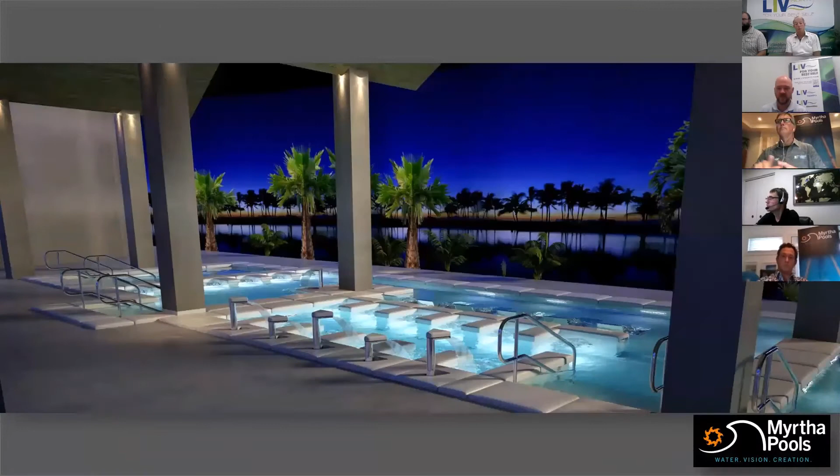We have an amenities division, which manages over 75 different facilities, corporate, college, with staffing right across Canada, pretty well every province.

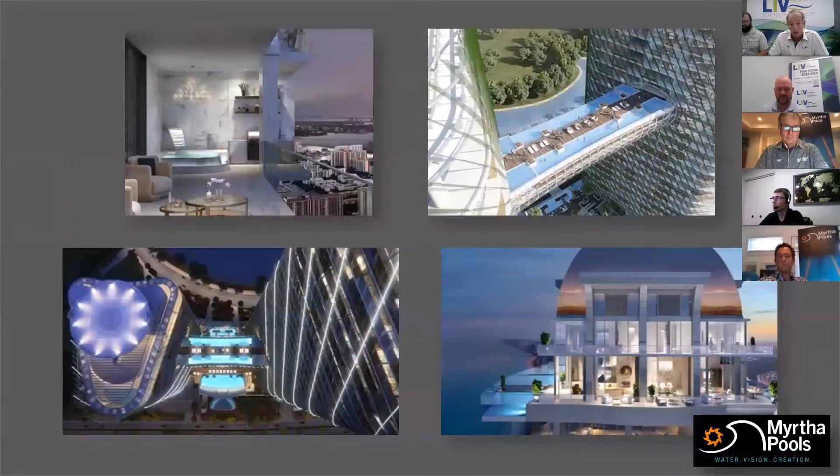They've got a digital platform and a virtual platform which have just taken off in the last 6 months, and we've introduced them into the high-rise residential market. The King Set building down at 99 Gerrard is going to be our first live experience building using that digital platform, tying into all the equipment in the area. So it's a pretty exciting time for us.

The Myrtha relationship has been a great one. We've been asked many times, do you do anything with pools, get into construction of pools? Obviously we don't want to be dealing with this concrete mess. When we saw the Myrtha technology, we said, here's an opportunity, this is the best option we can think of. It's clean, it's creative, imaginative, it's everything we need when we're dealing with these buildings.

So today is an introduction into that system. On the screen you can see we've got Dan Thompson, CEO for Myrtha Pools Canada. He's going to be introducing you to Myrtha. Alex Schmoll is the design manager for Myrtha, the guy we go back and forth with on all the designs. It's a very clean system when we take your rendering, bring it into a design, and send it back over to Europe to Alex. He's been great.

Mark Versfeld, I think, is on, yes, from Western Canada. For the few of you out west, we've got 2 salespeople in British Columbia, 5 in Alberta, and they liaise with Mark on a regular basis. And then we've got Ross Middleton, our senior accounts manager. He oversees the aquatics sales and division. He's in the industry, a lot of experience, done many pools, lived through many headaches you'll hear about.

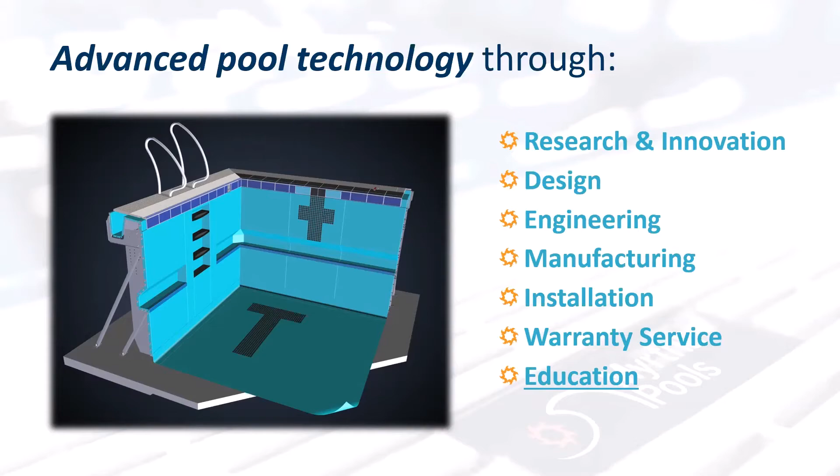We have 4 market segments, 3 shown here: competition, hospitality, leisure, and wellness. I'm not going to show you a bunch of glossy pictures of our competitive pools, but believe me, we have them. Myrtha Pools is known for its precision, enabling us to create the fastest pools in the world, from the Olympic pool in Rio to the rapid build US Olympic trial pools, which we build every 4 years and seat 18,000 people. Then they're taken down and sold to another community.

To the World Championship pools, over the last 10 years, Myrtha Pools is the gold standard in aquatic competition pools. In fact, over 145 world records have been set in Myrtha Pools to date. Frankly, it's that experience that has prepared us to become the right choice for developers in hospitality, leisure, and wellness market segments, and more importantly, elevated ones.

I'll be back in a bit to talk about wellness, but right now over to Ross to talk about Myrtha versus other build approaches.

Thanks so much. Thanks, Dan. Hello, everybody, and thanks for being here. An extra special thanks to everybody for taking 4 hours out of your busy day today to listen to the whole presentation. Of course, kidding, we'll keep it to a tight 45, respect for your time. On to the good stuff.

My name is Ross Middleton. I've been involved in condo amenities on and off for about 20 years now, mainly on the pool side of things, and in particular, the day-to-day upkeep, operation, and renovations of these pools. Although I tend to think I've seen just about everything there is to see in a pool, I'm still surprised every week by a new question or an exciting new project such as this.

So why did we decide to get into pool design and build with Myrtha Pools? Customer feedback. It's all about the customer feedback. I've been asked many times over the years if there was another option, another way to build a commercial pool other than your typical concrete pool. In the past, my standard answer was always no. Pros and cons aside, concrete was what people were familiar with and what was used. We ran into Myrtha Pools at a trade show a while back, got talking, and very quickly realized they addressed many of the common issues associated with a typical concrete pool.

So this slide and the next couple of slides are a comparison of Myrtha Pools compared to a concrete pool. There's some of the typical issues that I've encountered in the past on a day-to-day basis maintaining concrete pools. I'm not going to go over every point, as most of this will be covered in greater detail a little bit later on, so I'm going to focus on the big ones that I've always come across.

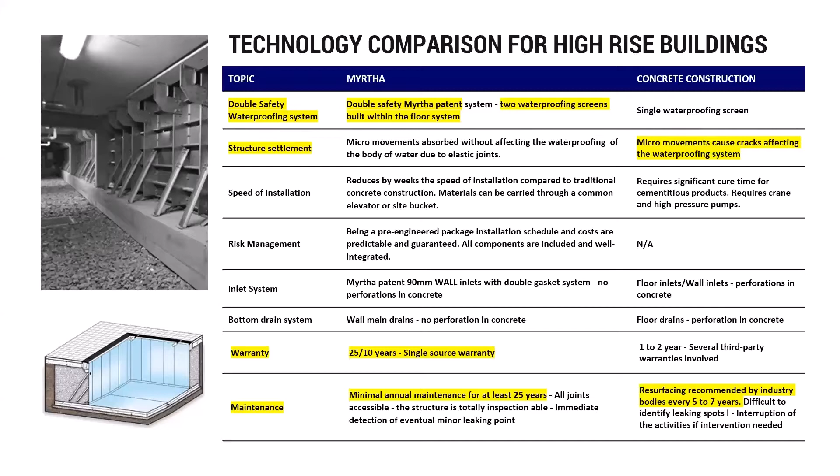The weight of a concrete pool is 450 pounds per linear foot in concrete. Myrtha is 65 pounds per linear foot. Those are crazy numbers.

Floor slab requirements: concrete requires heavy structural integral slabs. Myrtha requires no additional floor slab.

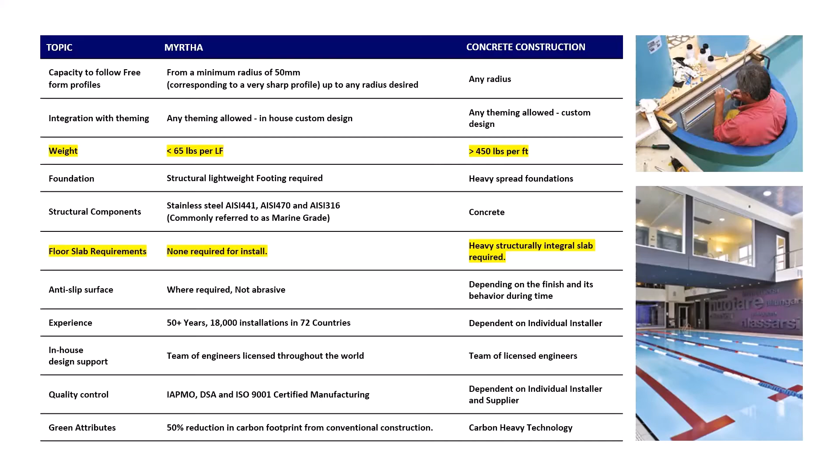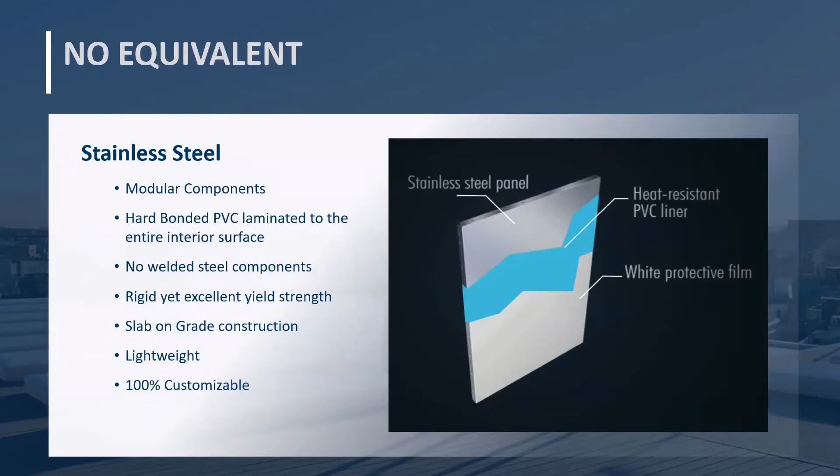Okay, so a little bit on our technology. Our panels are made of a marine grade stainless steel that has a PVC hot calendered to the face of it, and on the back side we coat that in a very thin acrylic coating, so essentially that steel is never in contact with your pool water. Additionally, there's a protective coating, that white protective film applied after the manufacturing process, used during shipment and during the installation.

It is a modular system with widths ranging from 900 millimeters and narrower, depending on the final dimension of your pool, and depths ranging from 0, or beach entries, all the way upwards of about 3.4 to 3.6 meters deep. We work in any sort of freeform shape. What you're probably used to seeing is our competition pools, very rectilinear, but that's a misconception. We can accommodate radiuses as tight as about 2 inches.

The major benefit of the modularity of the system is really in the elevated scenario, because all our components and accessories can be brought through a double door or through an elevator. So there's no need to crane up massive material; it can simply be brought up through manpower.

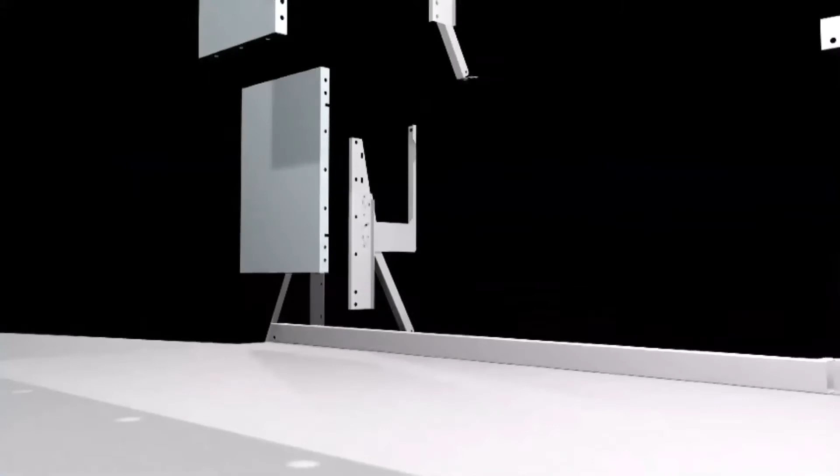Okay, onto the next video, speaking to the installation of our structure. Starting with the flat slab, stepped, or slightly sloped, the key points of the structure are laid out. Our C-channel base frame, at the bottom, is then anchored into the concrete with the elevation set.

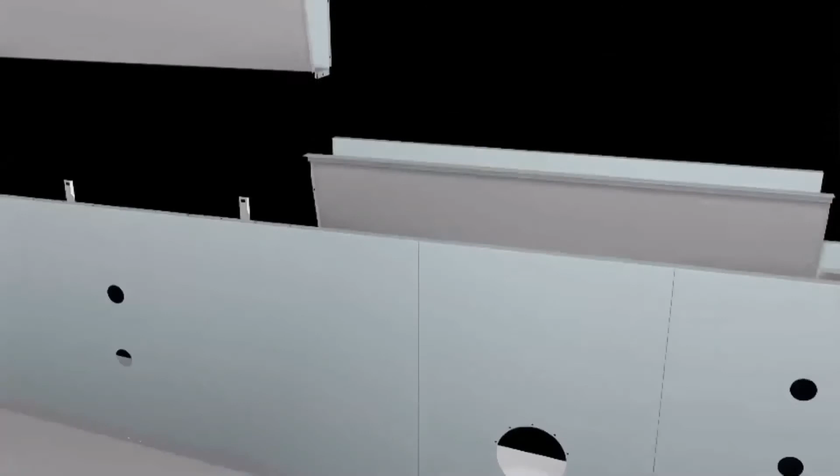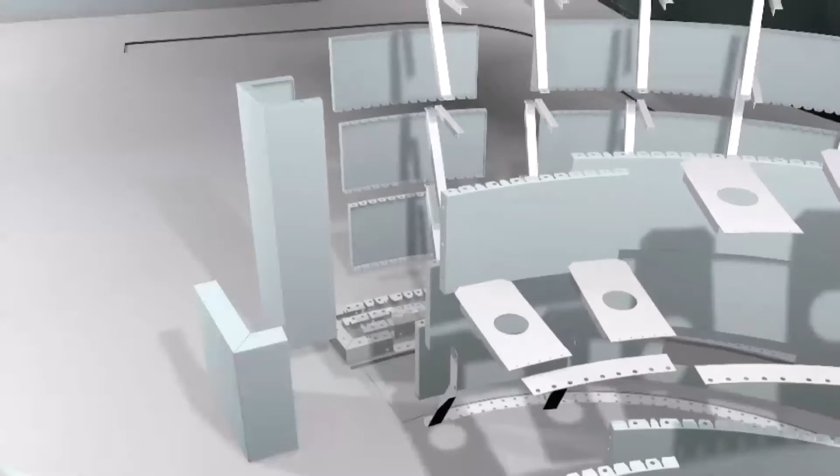Panels are then mounted with supports. Gutters are added, and final elevations are checked along the process. There are actually 3 stages, 3 checking elevation verifications along the way, to make sure that's exactly as defined and as designed.

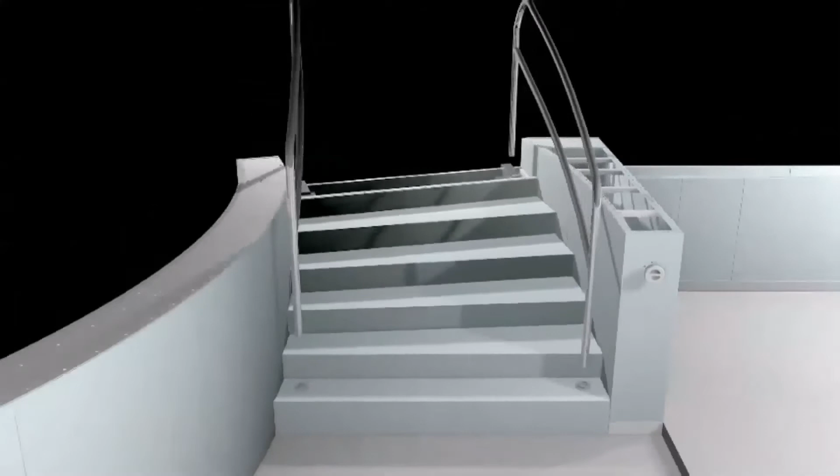Depending on the construction schedule, installation crews can either leave the site after the gutters are on and all the supports are in, for other works around the pool to be completed, or, if it's the case, continue on with waterproofing, and then continue to static test.

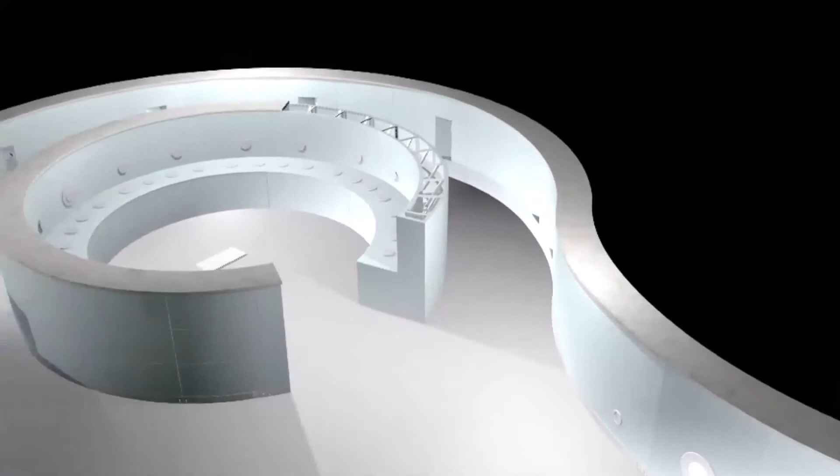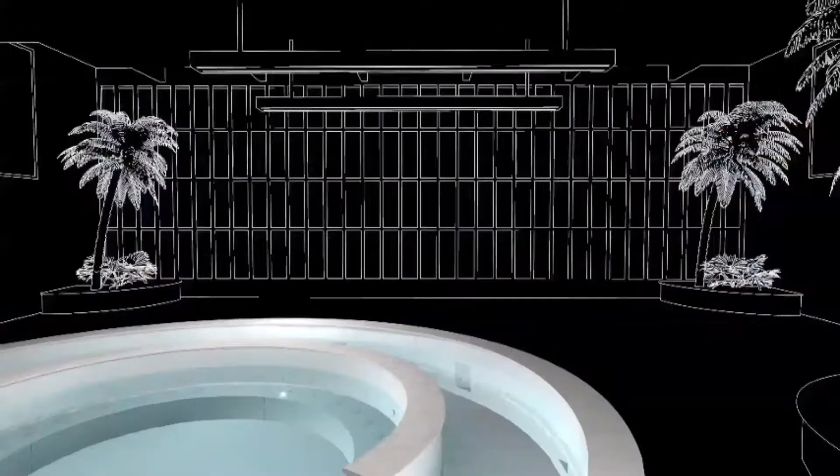We seal these panels using our liquid PVC, as well as applying our evolution membrane to the floor. Our liquid has a mild primer in it, which helps create a permanent bond between our panels, while the membrane extends up to the base of the panel where it's heat sealed, so in the end you get a watertight vessel.

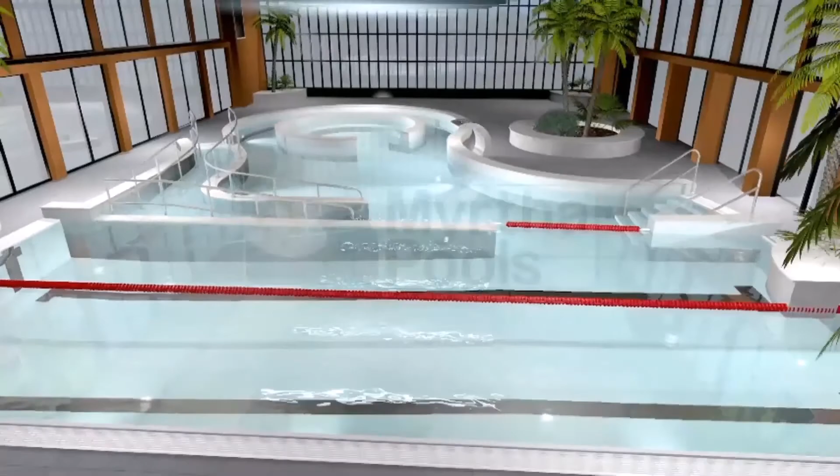We have a large catalog of gutters and skimmer styles, constantly innovating and customizing per client's wishes, and again virtually any radius we can accommodate. All our accessories come pre-located to site, so as far as guesswork on site, it's completely eliminated.

While our membrane panels are a finished product and can be left that way, you also have the ability to finish them in virtually any material. We have installs in Miami that have clad their spas in complete marble, or PebbleBrite. And again, the membrane itself can just be the finish.

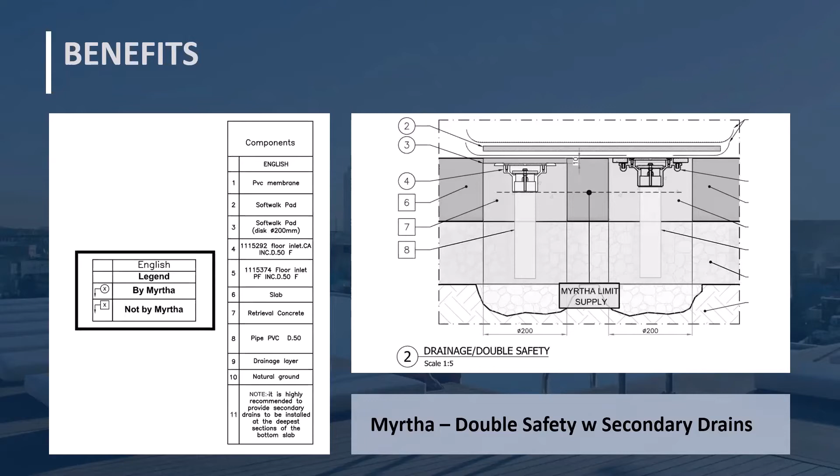If you'll skip to the next, this is a detail of our link plate. It's made of the same material as our paneling and used to provide a watertight connection between the pool edge and the surrounding deck. That lower red piece called the link plate, that would be that piece.

Actually this is reversed. The PVC membrane is meant to lie directly on that link plate, with the waterproofing layer over top. It provides a watertight connection between the pool edge and the deck, but because of that PVC membrane, it's also flexible. So it allows the pool to move somewhat independently of the perimeter deck, so you won't get potential cracking if your building is shifting, or swaying with the wind. It's coated in our PVC like our panel system, so it's a surface the deck waterproofing can be adhered to as well.

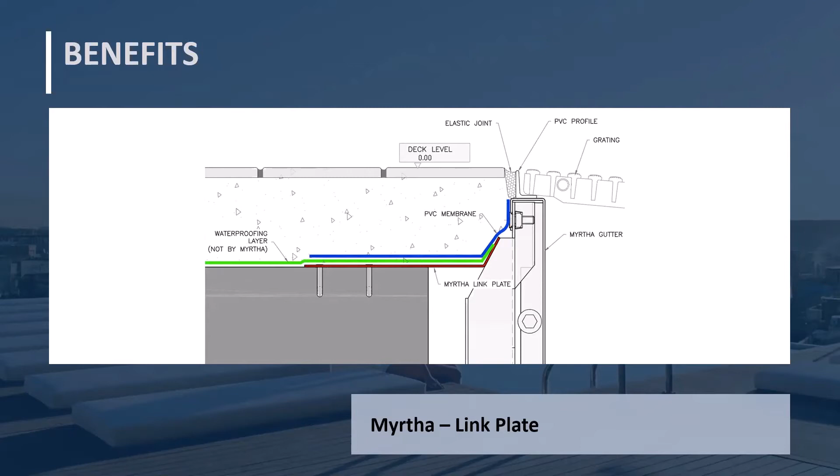As a rule of thumb, it's up for discussion, and we're happy to mount accessories in the floor, but we do like to pull everything into our wall panels, from inlets to lights to the actual bottom drains. The reason is it eliminates all the penetrations through that slab and any potential leak points. Thinking further down the design road, you could build a small curb around that pool and have a secondary or third containment system, because you're eliminating all those penetrations through the slab.

For the bottom drains, what we'll do is provide a gooseneck so you're still able to fully drain your pool, since as you can see in the detail, it sits slightly off the floor. Additionally, having everything wall mounted gives you access to them after the fact, so you're not embedding them in a concrete slab or wall. If there's an issue with piping down the road, you have access and can fix it with little to no disrepair or demolition, significantly less than casting it into a concrete slab.

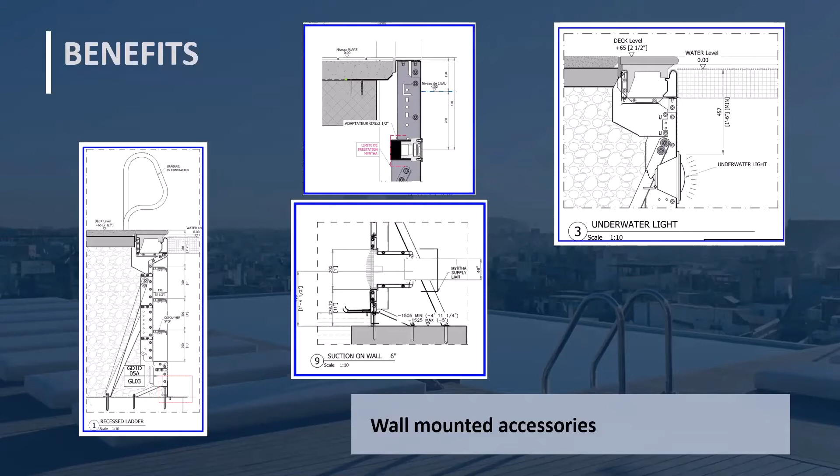Onto the next slide. This slide is meant to highlight the adaptability of our system. As Dan mentioned, we have over 300 plus designers at our home base in Italy, not including designers like myself spread throughout the rest of the world. As we work globally in over 80 countries, we're faced with a wide variety of situations and ever-changing scenarios, from full integration with infinity edge acrylics to converting structural building elements like grade beams into water features. We can achieve anything you're after. It may sound like a selling point, but we'll strive to do anything we can to achieve what you're after in the aesthetic.

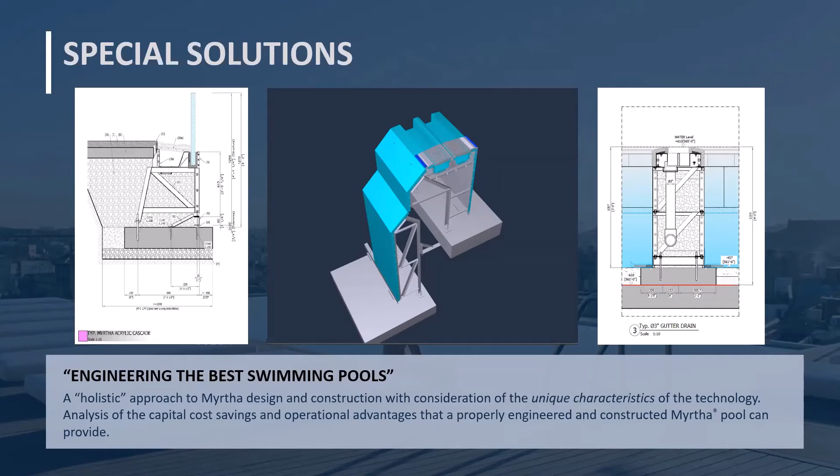On to the next. Speaking to integrated design, we have a design office located in Italy with over 300 designers, and we work in every sort of software out there, from CAD to Revit to BIM modeling to virtual reality, we can create it all. Further to that, we'll offer integration, since no one knows our system better than we do, so we prefer to model it ourselves. This slide showcases those different models and the integration of them.

The image on the left is the Myrtha model, the image in the middle is the architect's or aquatic consultant's model, and the one on the right is the finished model bringing everything together. The idea behind this is it eases the process, eliminates double duty of work, and streamlines the process for everyone. If you'll skip to the next slide, what we've done is create an Excel spreadsheet.

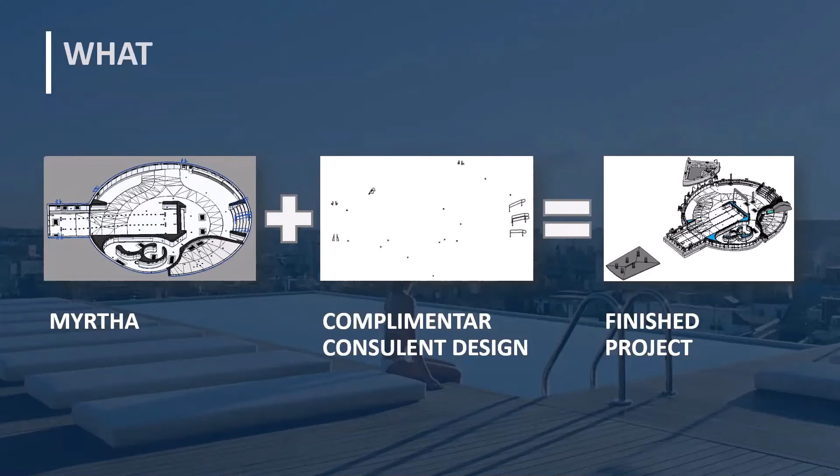This is an Excel spreadsheet that's highlighted the majority of accessories and other points that could be in a pool. Of course, this is always evolving, but what this does is help identify, locate, and quantify, and then whose responsibility it is. Again, this eliminates the unnecessary double duty of work.

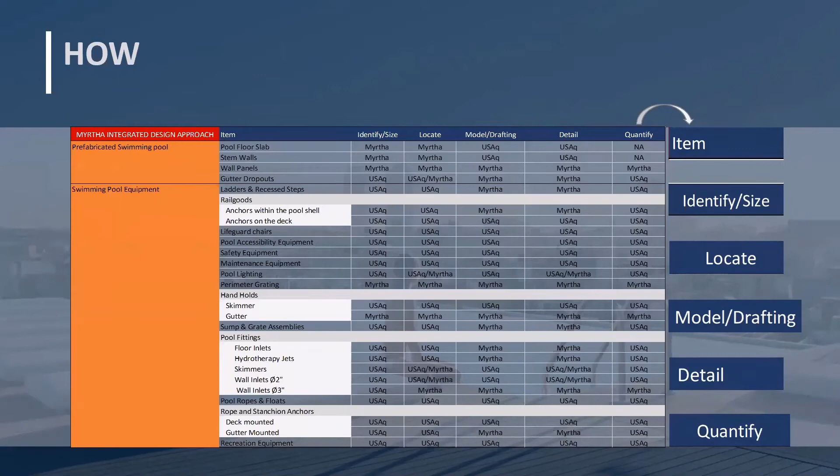Speaking to LEED design, if that's something your project or your client is searching for, we actually have a team over in Italy that's solely dedicated to this. So what we would do in that instance is connect the two parties, and working together, we'll try and achieve as many points as we can towards your project. That said, Myrtha can achieve up to about 44 points towards your project. Further information on that can be provided.

So speaking to some of our suspended pools, we'll just go through a few of our references globally. I'm going to highlight a few of the main interesting ones.

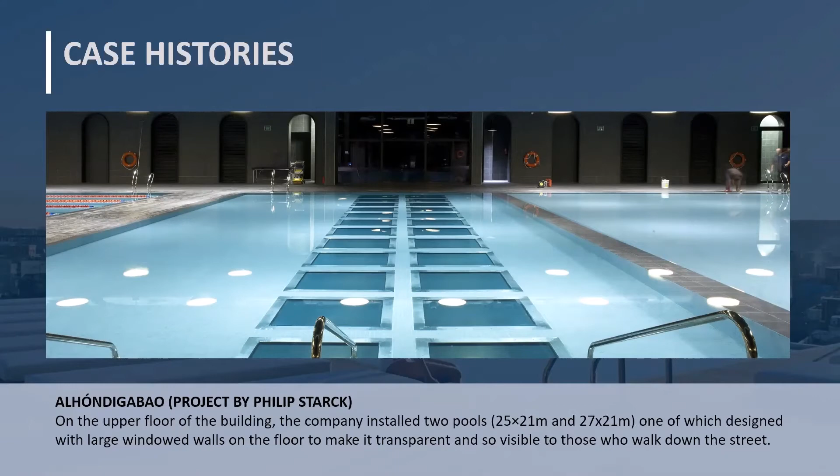This is an interesting one, a project called Alhóndiga Bilbao in Spain, designed by Philippe Starck. It's actually elevated on the 4th floor above a shopping mall. These are 2 foot by 2 foot acrylic panels set within the floor, again all provided by us. Underneath this is a walkway running the spine of the shopping center, where people will walk. Again, this is all on the 4th floor.

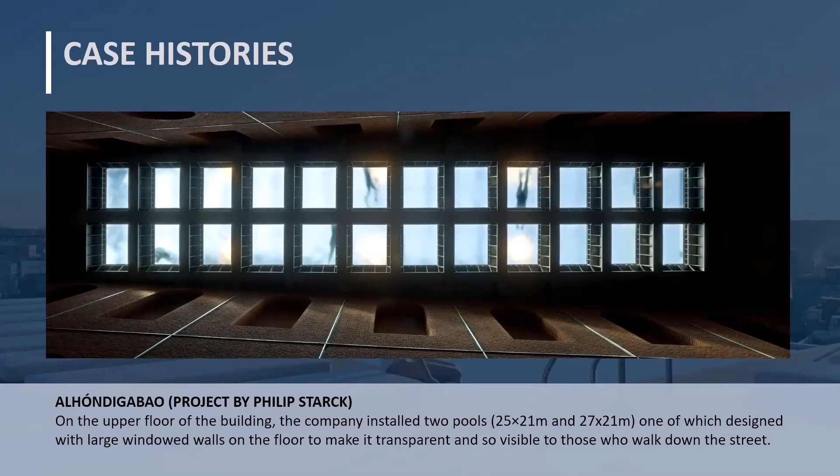Of course, hydro jets — we have a number of accessories in therapy and hydro that we can provide as well.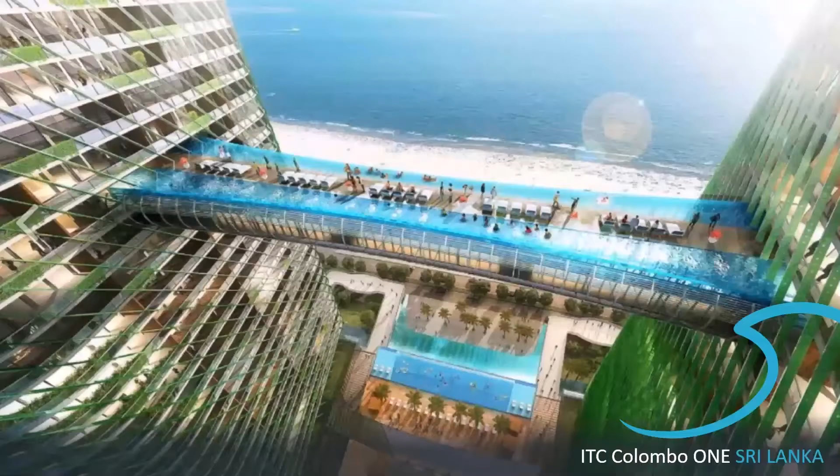Again, we had to overcome a number of obstacles in this, whether it be the actual installation or construction, because it was actually constructed on the ground and is being lifted up, but also the wind loads, because the desired effect is an infinity edge. So as soon as you introduce wind into that effect, it starts to dissipate. So anyway, on to the next.

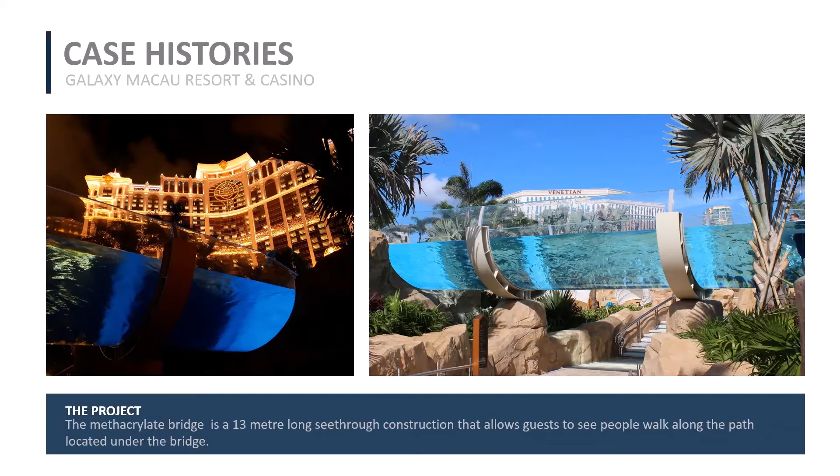So it is this one right here. It is roughly 15 feet wide, so it fits a double inner tube through that. Of course, it is supplied by us, the housing and the frames all by us as well, so it is patented, because in the summer heats, this acrylic will expand upwards of about 2 inches.

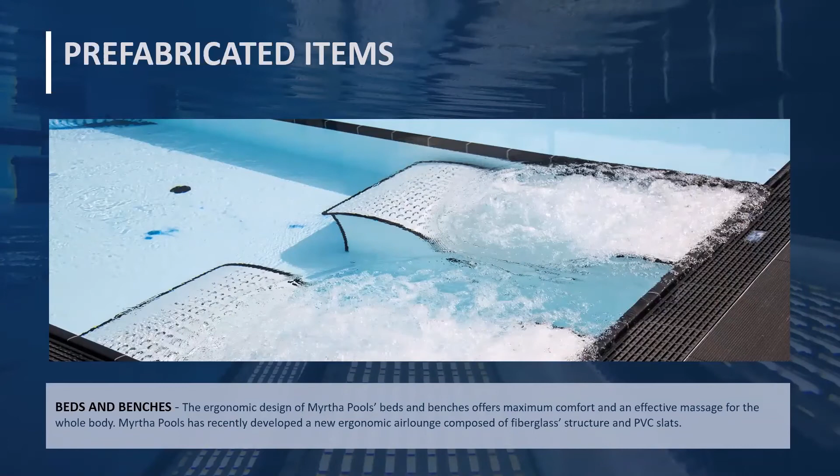All right, and I know that was fairly long-winded, so hopefully everybody was able to grasp most of that. And of course, any questions, feel free to reach out.

Great, I think it's back to me, Dan Thompson again. I want to talk about Myrtha Wellness. So let's go to the next slide.

Myrtha Pools discovered, especially in Europe, that while people want to be fit, more and more they want to be well. Myrtha Wellness is focused on giving people an unforgettable wellness experience. Our wellness division is focused on full design integration with a focus on future management and functionality.

Myrtha Wellness is focused on 6 services with a preference in full design, production, and installation. So consultancy, architectural design, technical design, production, installation, and after sales assistance.

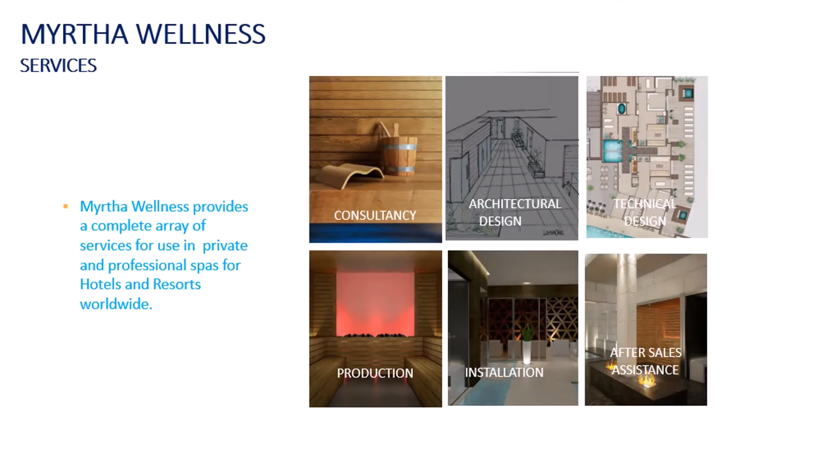So our design team works with you to fully understand the client's needs and objectives. We then develop a concept drawing and support your architectural and design needs.

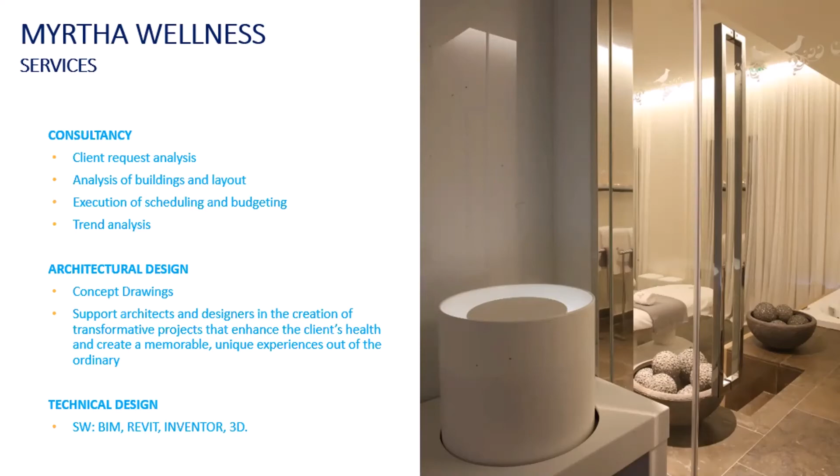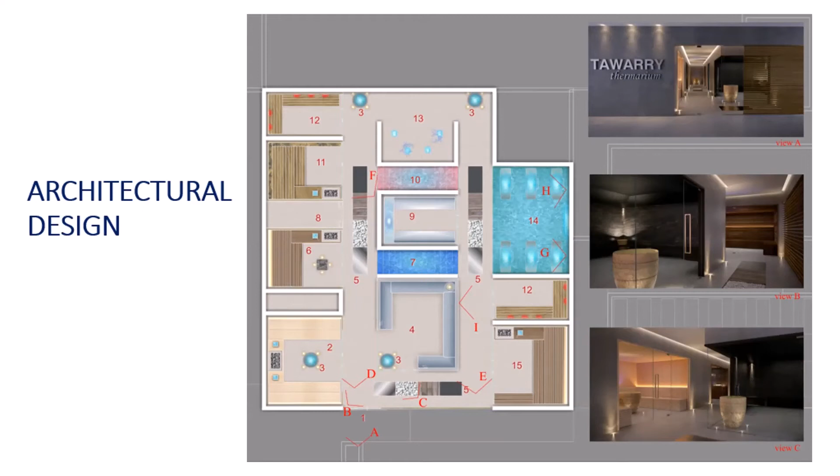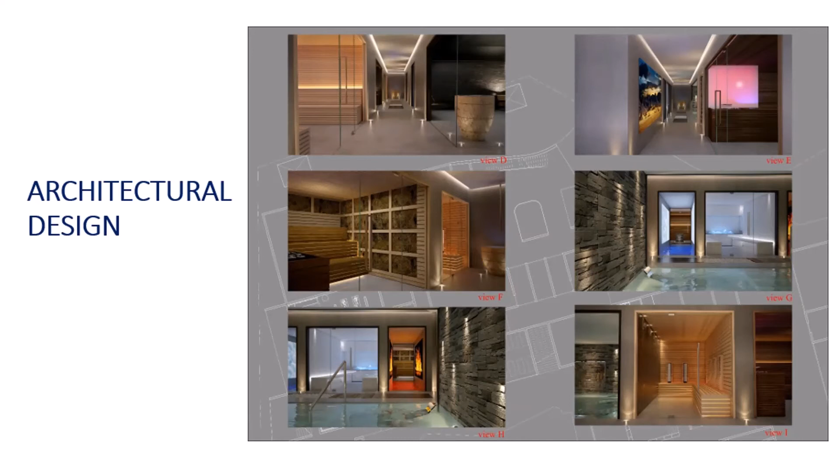And this is just an example of one. The next slide shows you some real life finishes to our approach, so you get a real sense from the work we do as to what the end product will look like. And then we fully design the project with your assistance.

So this is a great example. Villa Franca is a great example of our wellness capabilities. It's only about 30 minutes away from our factory, so when the world recovers from COVID, we'd love to host you there. It's been a big part of our business, hosting people, and we haven't had a visitor in 6 months. We're looking forward to COVID going away and getting a vaccine so we can move on.

Villa Franca is interesting. It's a renovated community center focused on recreation and wellness. The facility has a lap pool, a leisure pool, and a full service wellness center, a wonderful value add for the community. In Italy, if you're Myrtha and you want to build pools in communities, you need to be a partner, so Myrtha Italy created a division to manage facilities, and they actually manage this one. The municipality, Myrtha, and a developer renovated this space, which was an old bowling alley with a lap pool, converted into a leisure and wellness center. It's very cool—if you can make it to Italy, it's a great one to see.

This wellness center features a Finnish sauna, a steam room, plunge rooms, and a frigidarium, which is like an ice or snow room—I'll show you examples later. It's about a 30 to 45 minute experience that leaves people relaxed and energized, so if you come, bring your suit. What's really cool is that in 2021 we were building an exact replica in Candiac, a suburb of Montreal. It was great—we brought the developer there, he loved the concept, and he's going to build one this coming year.

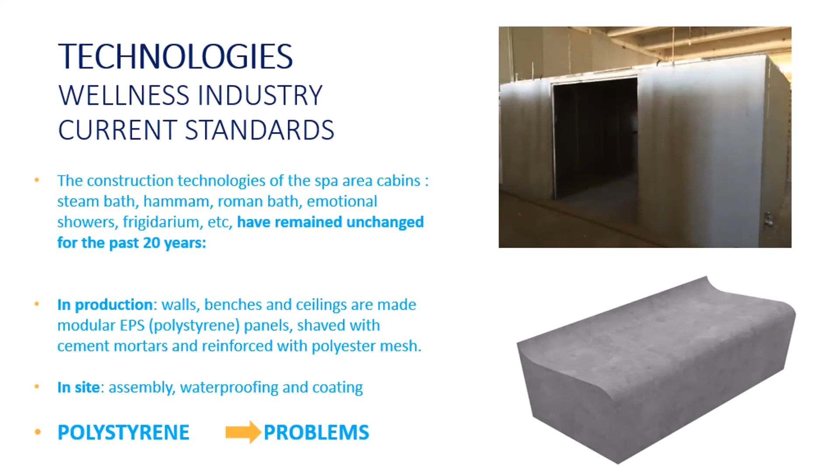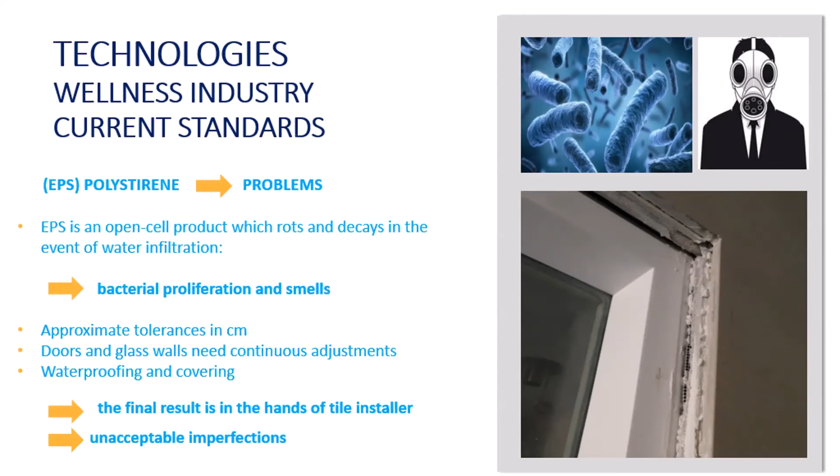I want to talk about Myrtha technology. Myrtha has changed up spa construction. Historically, spa construction utilizes EPS polystyrene panels shaved with cement mortar and reinforced with polyester mesh, and as many of you have learned, polystyrene leads to problems. Given the open cell nature of EPS, bacterial proliferation and smells can abound. Tolerances are approximate, leading to doors and windows requiring continuous adjustments, and the final results are frankly often in the hands of the tiler.

Myrtha is using its patented PVC bonded modular stainless steel process for walls and ceilings—we actually build the cabin. All accessories are pre-manufactured for easy assembly down to the final detail. For saunas, steam baths, frigidariums, and hot and cold plunges, we use the Myrtha stainless steel buttress system to build and create this prefabricated structure.

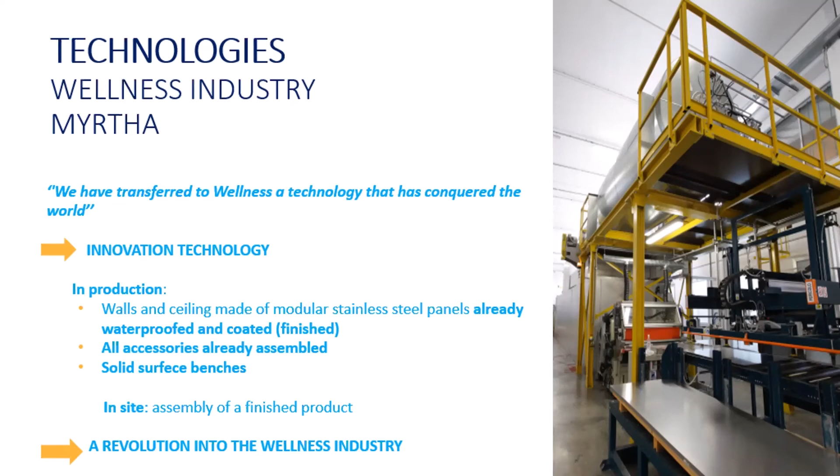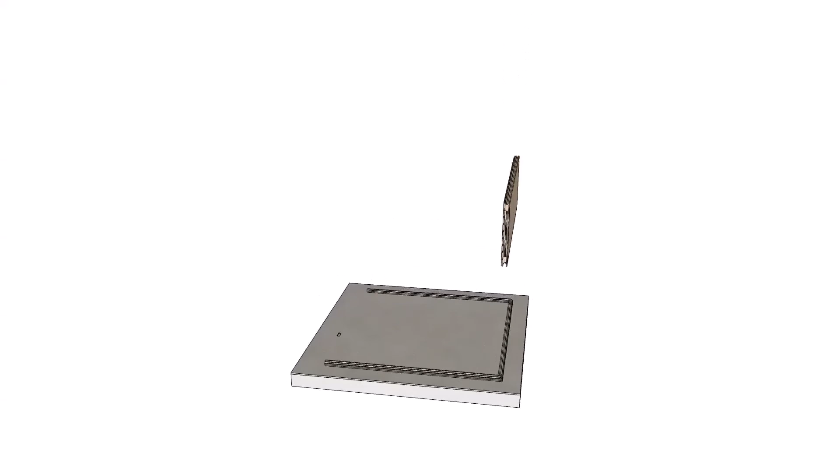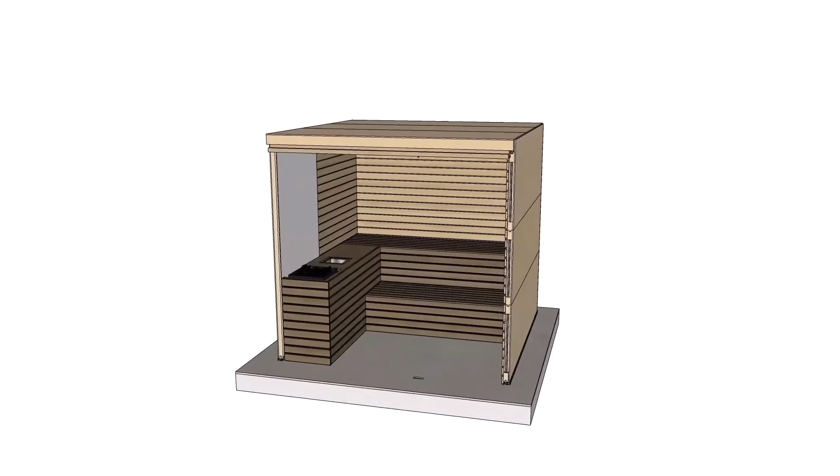We don't have to—this is a video, well, it's going, we might as well watch it. It's of a finished sauna and shows the construction. The steam rooms are made out of our panels and it's a little more dramatic, but this gives you a good sense. Basically all you have to do is prepare the floor in the tile you wish, and everything comes modular—it all fits together, shipped in a container, and put together by your installer. There are, as an example, 15 different sizes for our saunas and steam rooms. You get all the elements: the heater unit, the lighting, the wood benches or water features, etc., and even the glass doors. Great concept, fits together well, very modular—takes the guesswork out of the build for sure.

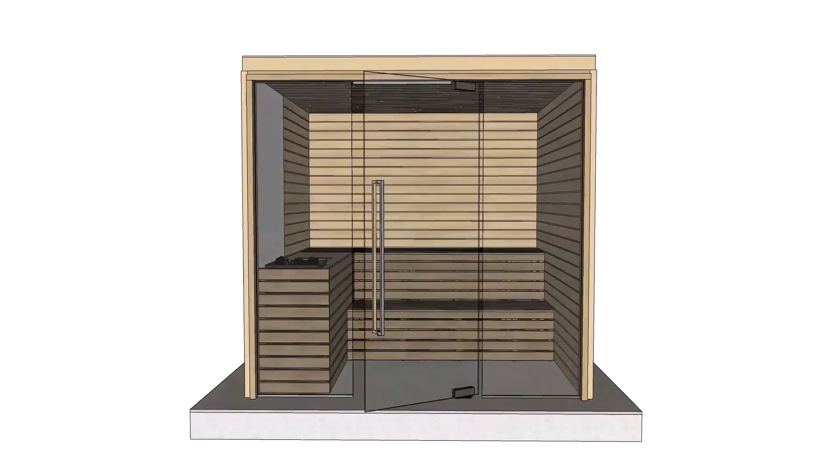Okay, let's go on to the next slide.

Myrtha is using its patented PVC bonded modular stainless steel for the walls and ceiling, as I just described. All accessories are pre-manufactured—I went through that. So play the video. Sorry, I'm on another slide. Okay, so this just talks about our system, the fact that we reduce the time to build, and then we take the stress out of putting your faith in the tiler to make sure it all fits properly.

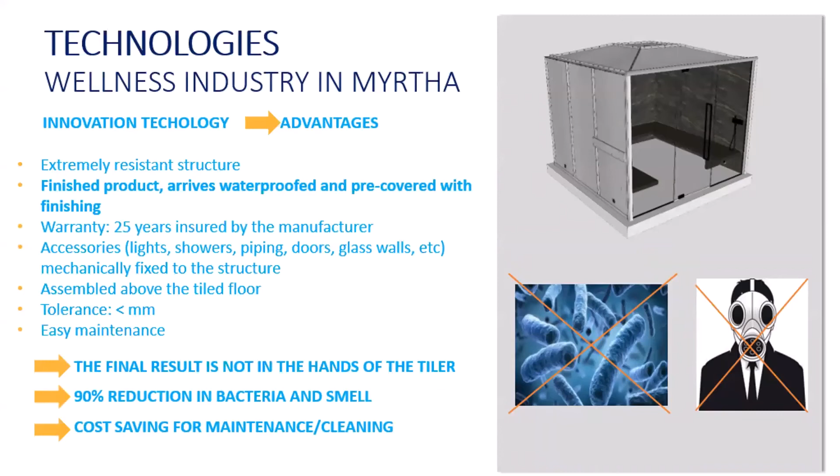Next slide. I'm just going to go through a series of images of our various products. So this is the steam bath. Next slide, go through this quickly.

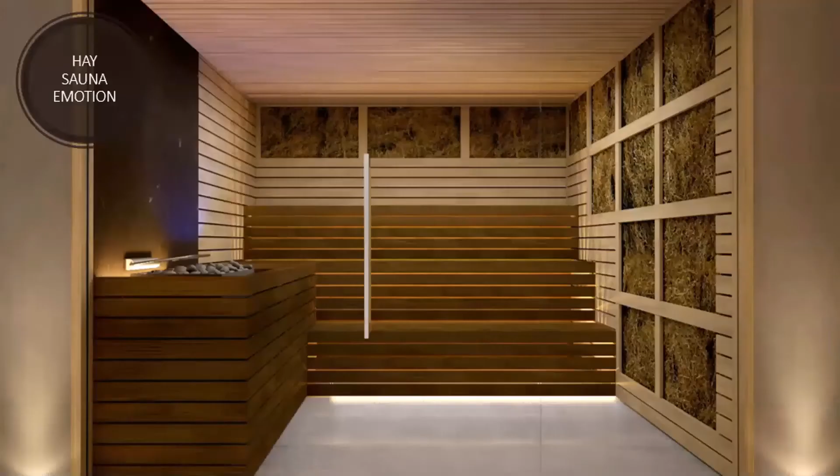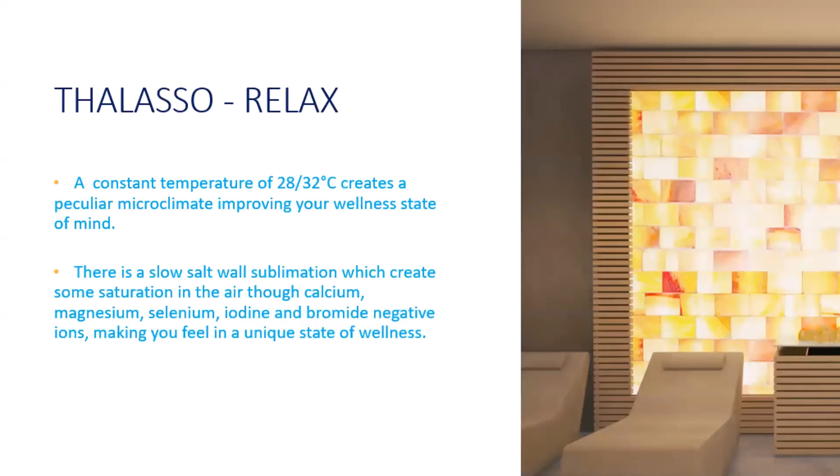And this is a relax area. So this is a salt room. Next slide, just hang on here for a second.

So we supply the wall with the salt cubes and the heat unit, and then you buy separately the different lounges. We have a huge variety of lounges that you can buy, which I'll show you in a second.

Okay, next slide. This is interesting - this is a frigidarium, an ice fountain, which comes as either an ice unit or a snow unit. At our factory, we've got a great display with the Matterhorn in the background. So if you're in Vancouver, you could have Whistler; if you're in Calgary, you could have Lake Louise, or whatever's relevant.

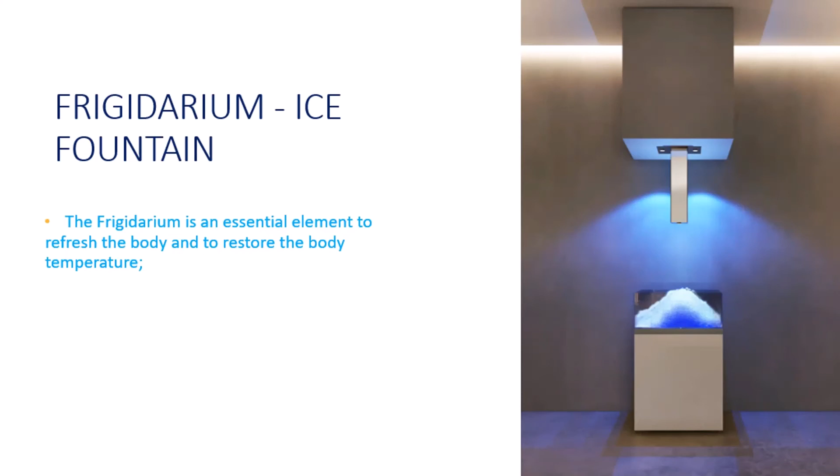Basically what you do is splash yourself with ice, then go into a sensory shower and cool down. Next slide - just showing you some different examples of this ice fountain with different sensory showers.

The plunge pool is really interesting - these plunge pools are hot and cold systems. The water is generally 14 to 15 degrees Celsius on one side, and 35 Celsius, 95 Fahrenheit on the other side. This aids in rapid muscular recovery and elimination of lactic acid after intense training.

So it's part of the routine you go through in our wellness spas, and this is very, very refreshing. Next slide.

I've just touched the surface. This shows you some of all the products we produce - steam baths, Finnish saunas, salt rooms, cold experiences. Next slide - experiential showers, and there's a whole series of these, very interesting with the mood lighting.